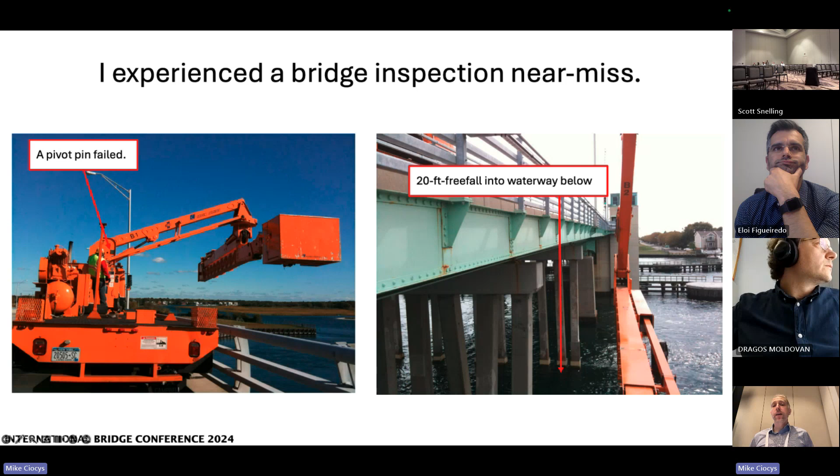But the point of the story is, bridge inspection's really hard. It's hard to be thorough when you're gathering information. There's safety issues, for both the inspectors and the public, and you clog up traffic and so forth. I don't think structural health monitoring is going to replace bridge inspection anytime soon, but it can make bridge inspections more productive, more thorough, provide quantitative data, and thereby increase the safety of both bridge inspectors and the traveling public.

Just from a high-level view, there's about 600,000 highway bridges in the US. About 7% are structurally deficient or in poor condition, but only about 60 bridges, as of that data point from 2020, so there may be a few more now, but a tiny, tiny fraction of those have any sort of structural health monitoring system on them.

Now, most structural health monitoring systems today may cost hundreds of thousands of dollars. So the sort of bridges they go on tend to be new construction, signature bridges, long span type bridges designed for a 100-year design life, and we're not going to be really worrying about those bridges for decades. Meanwhile, the bridges we're actually most concerned about most of the time go completely unmonitored.

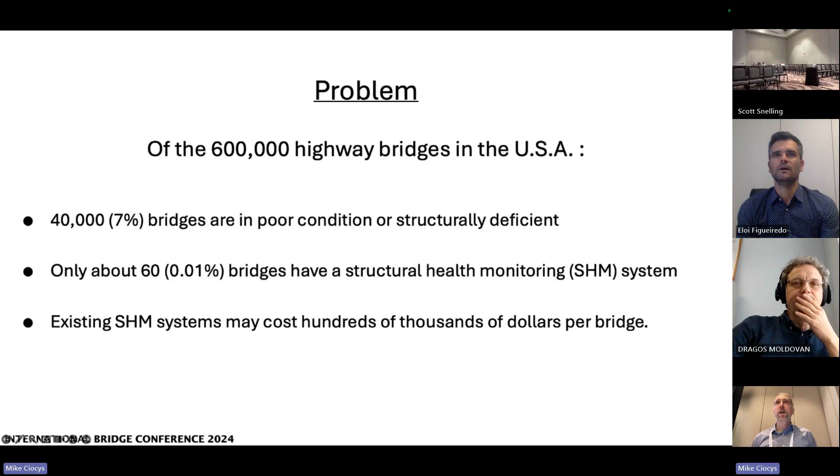So I co-founded Roebling Labs with a vision of bringing sensors with real-time analytics to every bridge. We're a startup, we were accepted into the Boston University Build Lab, which is a startup ecosystem, received a little bit of non-dilutive funding with the goal of building tools towards achieving this vision.

We think this aligns well with what we believe is inevitable, and we seek to be a part of it. The USDOT, in their most recent strategic plan, talks about advancing the use of advanced sensors. So we think we're in good company with our goal.

Good morning, everyone. First of all, I would like to acknowledge Ionut Moldovan. It has been really important to develop this App4SHM, a smartphone application for structural health monitoring.

First of all, let me tell you that bridges are just a small part of the huge network that bridge owners and authorities need to manage. Besides the roads and railways, the authorities need to pay attention to their bridges.

Currently, as you may know, we are using so-called bridge management systems, and they rely a lot on visual inspection. So the goal in the last 30 years has been to develop some kind of system that can measure data in real time and give quantitative answers to bridge owners to support bridge maintenance. This is where structural health monitoring is trying to be.

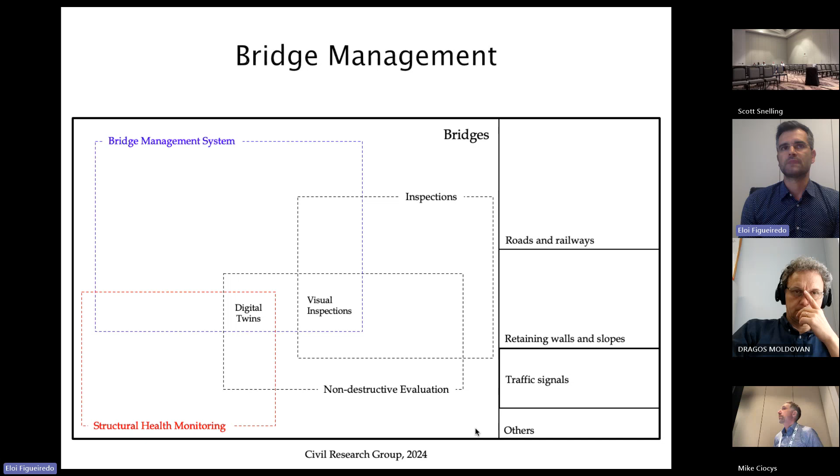What is structural health monitoring? Basically, it refers to the process of implementing a strategy based on monitoring systems to measure in real time the structural response in order to identify damage at early stages. The idea is to mimic the human nervous system—that's where we wanted to get. We are not there yet, but we wanted to get there.

In order to do so, we have tried to pose structural health monitoring in the context of a statistical pattern recognition paradigm, which can be split into 4 stages: operational evaluation, data acquisition, feature extraction and generation, and statistical modeling for feature classification.

I would like to point out the value of data acquisition, where basically we need to collect data using sensors. Once you have the raw data from the sensors, we need to extract some kind of features that can be assimilated to the presence of damage. Once we have these features, we need to somehow model them in order to identify the existence of damage. This is how we pose this paradigm.

So in order to do so, we came up with this idea to develop an app which can be used by everyone and can follow the statistical pattern recognition paradigm. Basically, we wanted to simplify SHM and make it available for everyone to use.

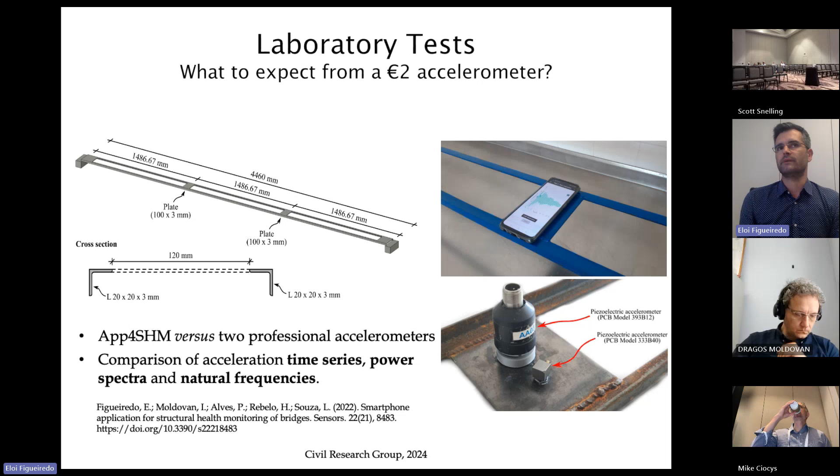Picking the first three natural frequencies of a steel beam in the lab, we realized differences of 0.5% comparing both systems. 0.5% in civil engineering is almost nothing. So it means the app is able to estimate natural frequencies very similar to the ones we used to estimate with the more expensive accelerometers.

We were even able, with that steel beam, to test the ability of our app to detect the presence of damage. In this case, we simulated the presence of damage using different masses positioned in different positions. The first mass is 25 grams, then 50, and 100 grams. You can see the cell phone over there used to get all the measurements we need.

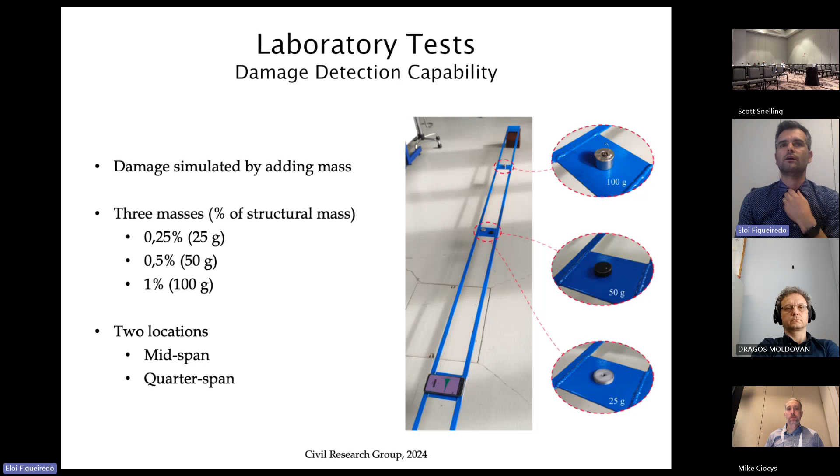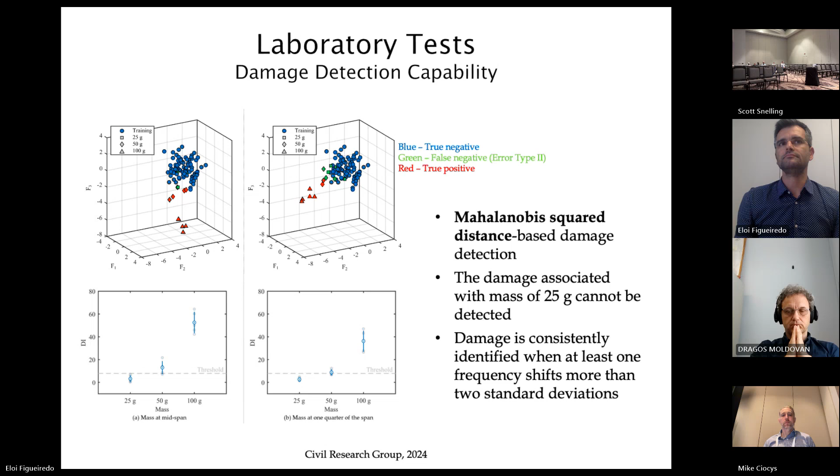So keep in mind, we were able to get the data, train a machine learning algorithm, and then test the existence of damage. Let's move on to another bridge—a real world application, what we call the twin bridges. They are concrete bridges, pre-stressed concrete bridges located in Brazil.

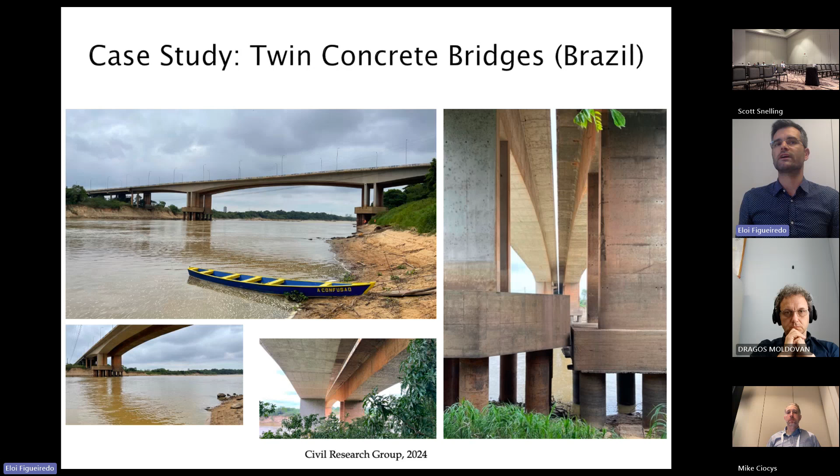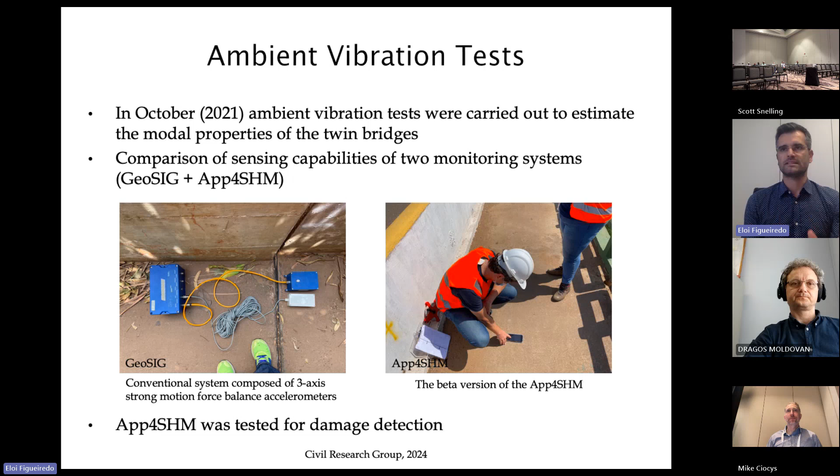Once again, we had the opportunity to compare the results we get from a $2 or €2 sensor inside our cell phones with other sensors, in this case from GeoSIG, which can cost roughly €10,000 or $10,000—that equipment you can see over there in blue. So we compared both systems and look at what we got.

We got a 20-minute window. In that 20-minute window, we got 5 observations with the app, roughly 30 seconds each in terms of time series. This was under ambient vibration, and then we compared it with a 20-minute time history or time series record using the traditional sensing.

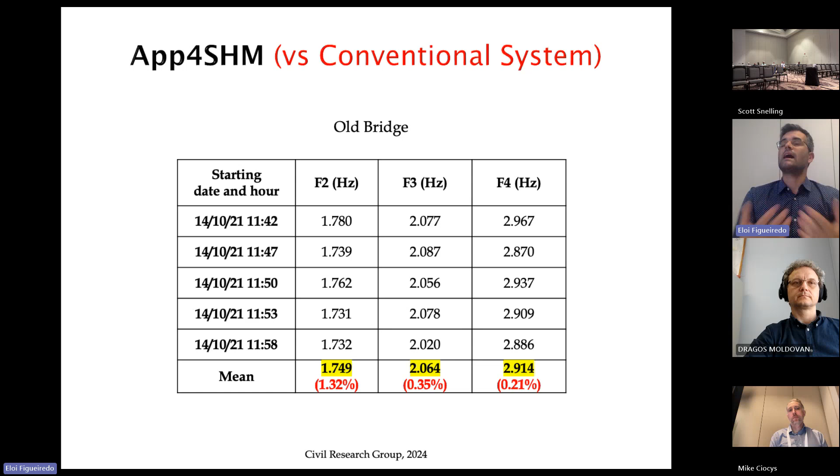Once we have one observation from the traditional sensing based on a 20-minute long time series, we got 5 samples with our cell phone, and we got the average of our 5 samples with our cell phone. We got differences of roughly 1% or even less, depending on whether it's the second, third, or fourth natural frequency.

Once again, our app and our smartphone is able to get a very good estimation of the natural frequencies. So we might say they are sensitive enough to detect natural frequencies under ambient vibration, as you can see in real world bridges. We also tested our app in order to detect anomalies. Basically, this is a 2-stage process: first, we need to collect data from our bridges, building a data set with the first 3 natural frequencies from our bridge.

Once we have a huge data set, we are able at any time to get a new observation and compare it with the past. That's what we have done for both bridges over 1 year. Stage number 1: we identify the bridge, in this case Itacaiúnas New Bridge, since there are two bridges, the new and the old. This is the identification. Step number two: we collect acceleration time series, in this case for roughly 20 to 30 seconds, and then we extract features. We repeat this 165 times to create our data set for 1 year.

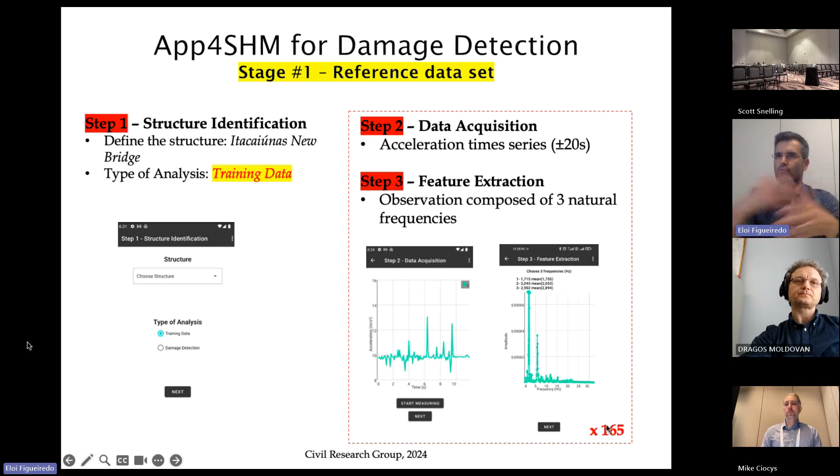As you can see, here are the two bridges, and you see Yonut laying down the smartphone and getting the data sets. Here you can see a three-dimensional feature space with observations composed of the first three natural frequencies, for the old bridge in black and the new bridge in red. Each dot is an observation composed of three natural frequencies. It could be the first three, or we could choose among several natural frequencies, it could be four or five. We developed this as a prototype app and defined it for three, but it's up to you.

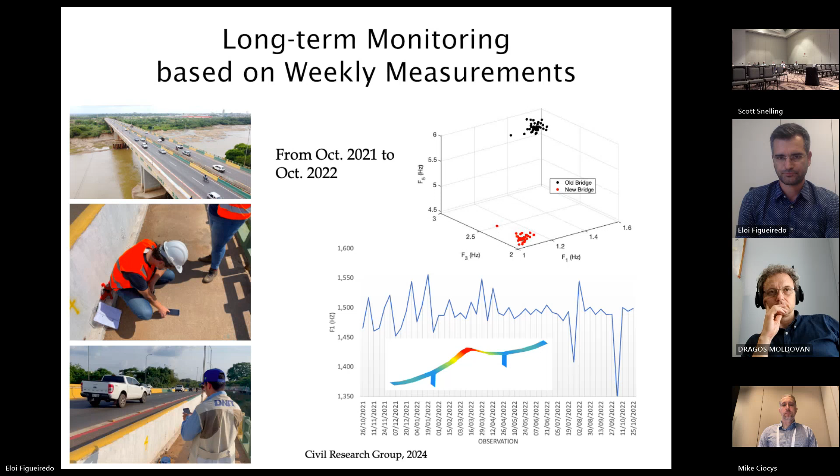Then we tested the robustness of our app. How? We kept the reference data set from the new bridge, and tried to get a new observation from the old bridge. We asked the app: is this observation similar to the ones we collected in the past? The app said no, this observation is quite different from the ones measured in the past, and gave a red dot, way above the threshold. Of course, we were measuring this new observation on a different bridge, the one on the side, but I was trying to show the robustness of our app. This is just an academic example.

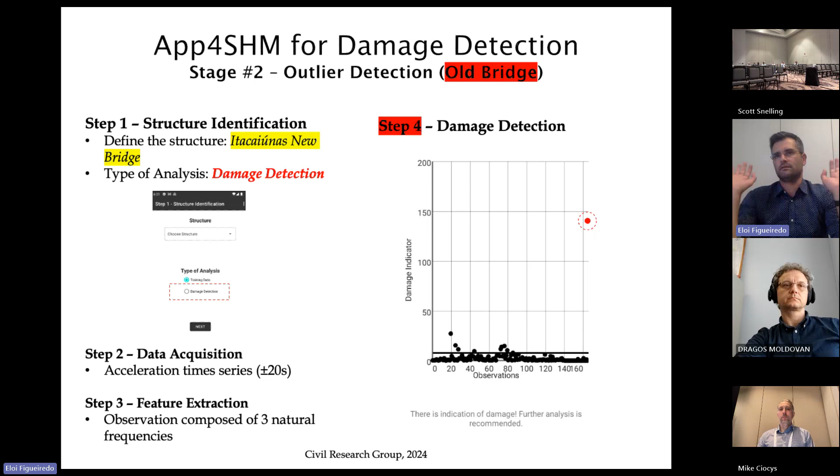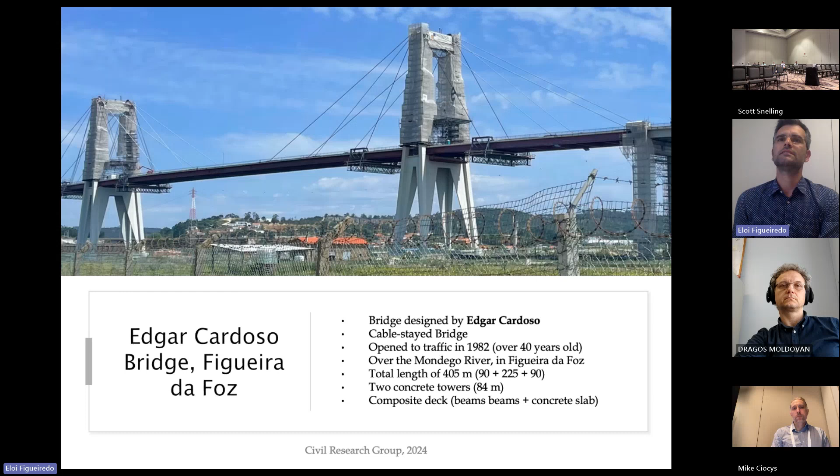Let's move on to another bridge in Portugal: the Edgar Cardoso Bridge in Figueira da Foz. This is a cable-stayed bridge which is being retrofitted. The bridge owner, Infraestruturas de Portugal, asked us to get measurements before, during, and after the retrofit, and we used our app. They wanted to replace those cables, so let's use the app to estimate the internal forces. That's what we tried.

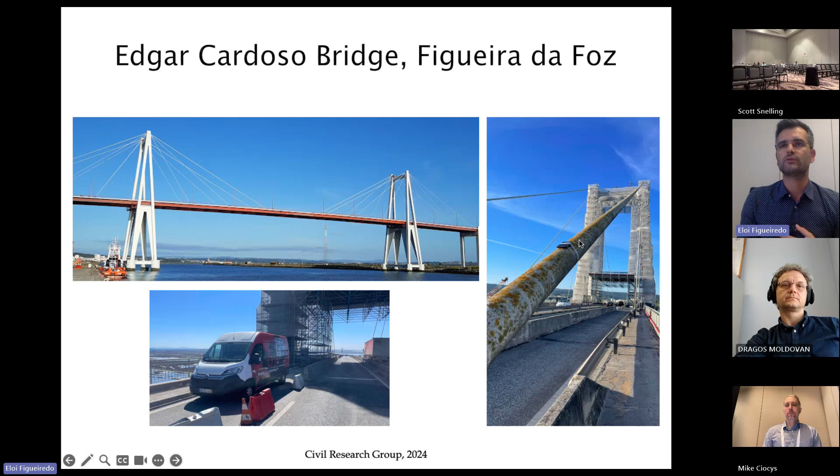I will try to show you how we can do that. So this is the bridge, as you can see. You can see the smartphone taped to the cable in order to get the time series. In closely, you can see Yonut, my colleague, handling the smartphone to get all the measurements we need. This is an example of step number 1, step number 2, 3, and 4.

So basically, you need to identify what is the cable. You get the time series, in this case, for roughly 40 to 50 seconds. And then you get a power spectrum. Of course, you have many peaks. You need to know in advance which peak you want - this is a drawback. And then you pick those natural frequencies that belong to the cable.

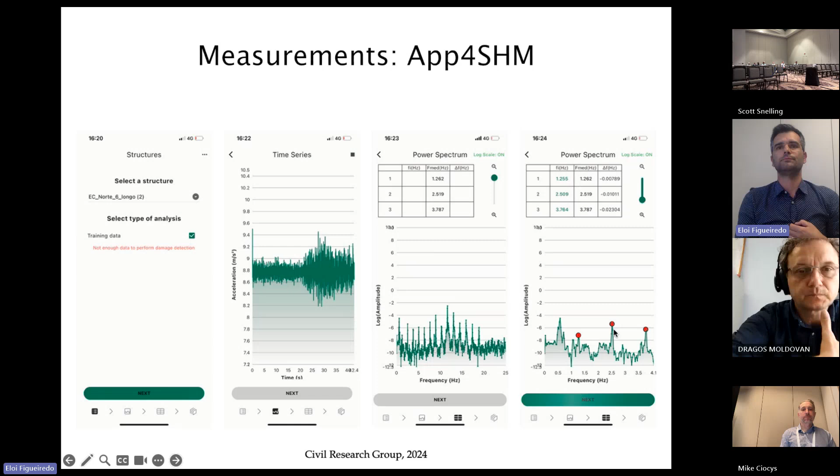And then we are able to somehow, using a linear equation, go from the natural frequencies into the internal forces. And so that's what we did - we estimate the internal forces based on the first 3 natural frequencies.

So we compare those results to the ones we got in 2021 with the traditional system. In 2021, with the traditional data acquisition system, using the first three natural frequencies of one of the cables, we got an internal force of roughly 9,500 kilonewton. In September 2023, with our app, we did the same and we got 10,000. We have 5.5% more internal normal force.

And you may ask, oh my God, you have a difference of roughly 5%. But there is a justification for this difference, and we confirm with the traditional system on site. What happened is this bridge is being retrofitted, and they had additional mass caused by those jerseys, those separation barriers. They had additional mass on the deck, which was causing this incremental axial or normal force in the cables.

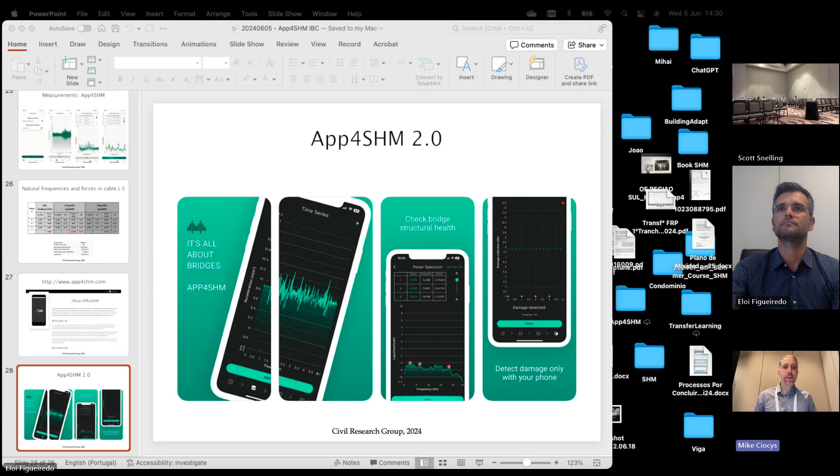The apps are free. Roebling Labs has an app as well that has similar capabilities, some differences. But I have tested all the apps on bridges around the Boston area, and it's pretty interesting. If a bridge is very stiff and doesn't have much truck traffic, I wasn't getting consistent readings, but on simply supported steel bridges, you can get very consistent readings with the app.

And I think the real opportunity with smartphone accelerometers is a crowd sensing model. So setting the phone down on the bridge and taking a vibration reading works, but it's not that convenient. It can be convenient, but the crowd sensing model is when the smartphone is in a car and travels across the bridge - you get accelerometer data. For one pass across the bridge, that's not that good, but for 100 passes, you start getting quality data and can start pulling out damage sensitive features. It's like you have accelerometers laid across the whole bridge when you start getting that big data. So some of those - who has that accelerometer data?